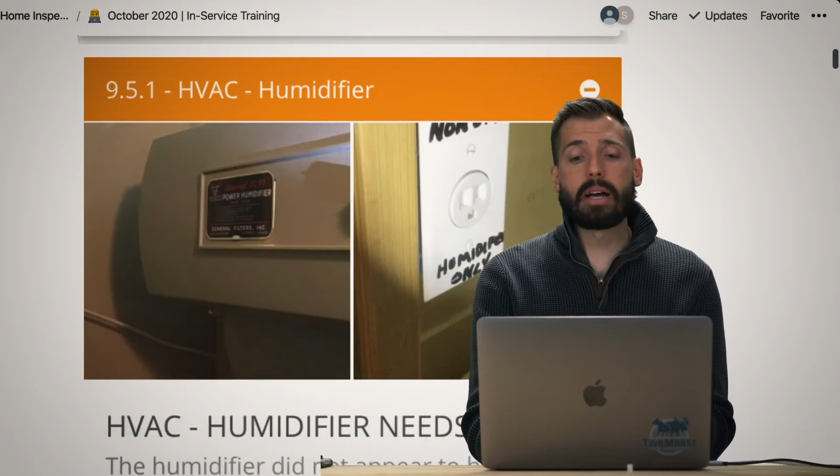So then this one here, a humidifier was just not plugged in, so we want to get that plugged in. Right now in our area, there's a bunch of freezing cold weather coming our way. We actually now have a big snowfall and we have snow staying on the ground, and it's pretty typical for our area.

Where we're at right now is almost 10,000, about 9,500 vertical feet. We get snow pretty regularly and pretty intensely, so our winter season is here, and we want to make sure that whenever our inspectors go out, they check that the irrigation is properly winterized.

That's beyond the scope of the inspection. All we're saying is, pretty please, make sure this has been winterized. Inquire with the seller, make sure it has been. And as a homeowner, you want to make sure you're winterizing it every winter before it starts to freeze.

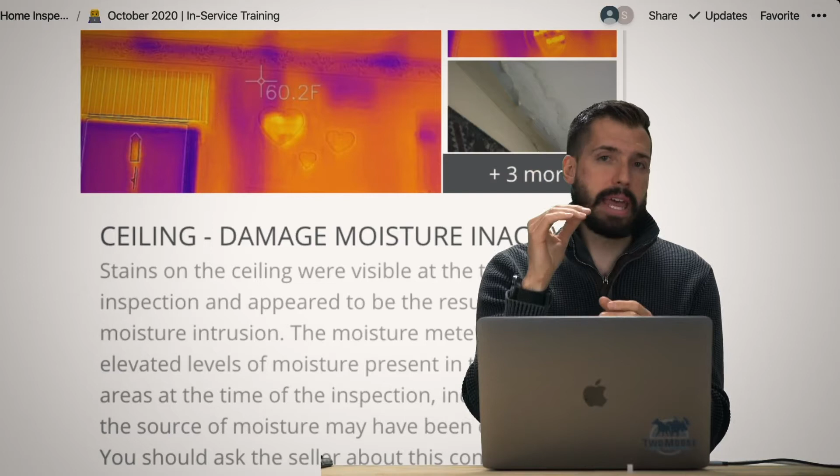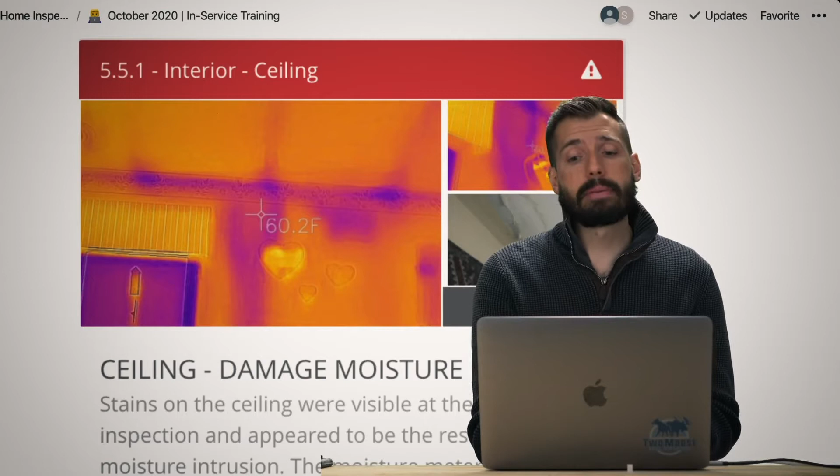So then, ceiling damage with moisture. This one was really strange. There was a plumbing exhaust vent, and there was water damage that totally destroyed the ceiling. But there was no damage between the roof and that first floor, only down on the lower floor. Looking at the thermal camera, it looks like that leak is following down the pipe, and wherever the pipe turns to the right, the water is falling off and causing damage to the ceiling. So we got that all written up.

Exterior grounds: this particular house was in a floodplain area. As an inspector, we want to make sure you're getting the proper insurance and that you're aware that in a case of a 100-year flood - which doesn't mean every 100 years, it means that's the likelihood of it occurring - and recently that occurrence has been greater and greater. So if you're near water, in a floodplain, and it's highly visible to us as an inspector, we want to make sure you're covered.

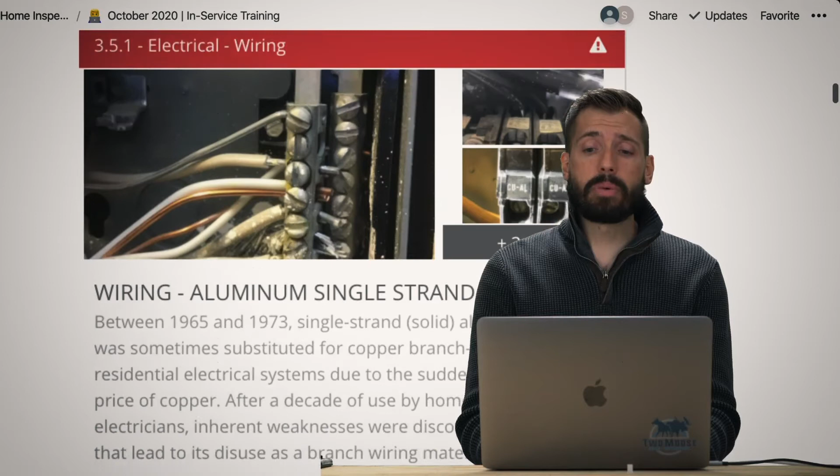Then we have aluminum wiring, single strand. Aluminum wiring is a really good way to catch your house on fire. So we want to make sure it's using the proper type of connections, as you can see here. If we see aluminum wiring, we really want the homeowner to be very much aware, because sometimes houses with aluminum wiring have a difficult time getting insurance and other things along those lines.

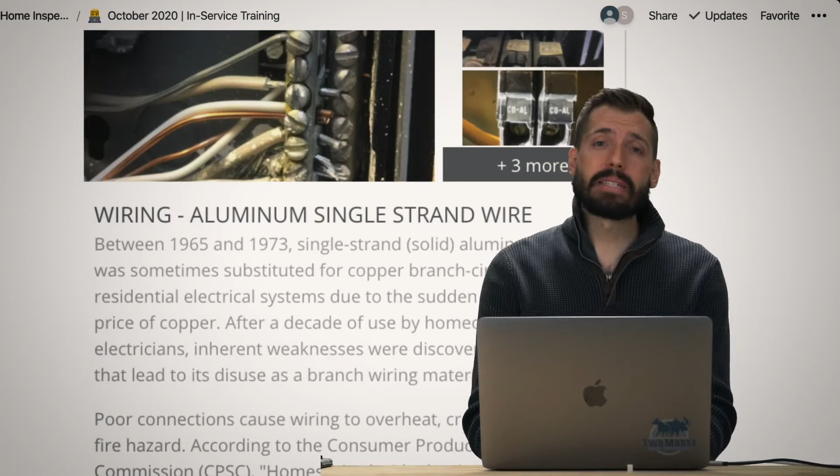Now, the aluminum wiring can be corrected, it just has to be done correctly. A lot of people that do electrical work don't necessarily know what the rules and regulations are behind aluminum wiring. So whoever it is, you want to make sure they are competent and know exactly what it is they're doing or should be doing.

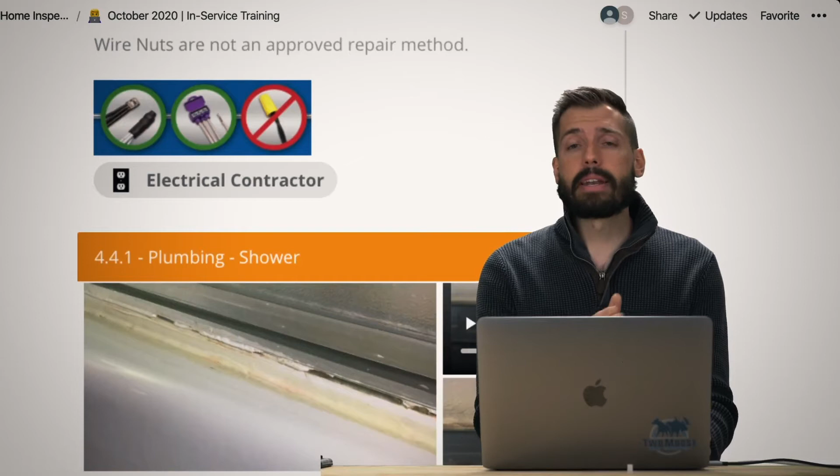So then, moving down - shower door loose. This whole door was actually loose and not at all connected to the bathtub. Little things like that we find, and that was just kind of an amusing thing to have found.

This one here, your service panel - you want the hot tub GFCI breaker to be present. There was none. Imagine a GFCI is basically saying, I'm going to give you electricity, you're going to give me electricity back. As soon as that circuit is broken, the GFCI cuts it off and prevents you from getting electrocuted, which is what we're looking for. So obviously for a hot tub, where there's a lot of water and electricity moving those pumps, we really want to make sure that's taken care of with a proper GFCI within the proper distance from the hot tub.

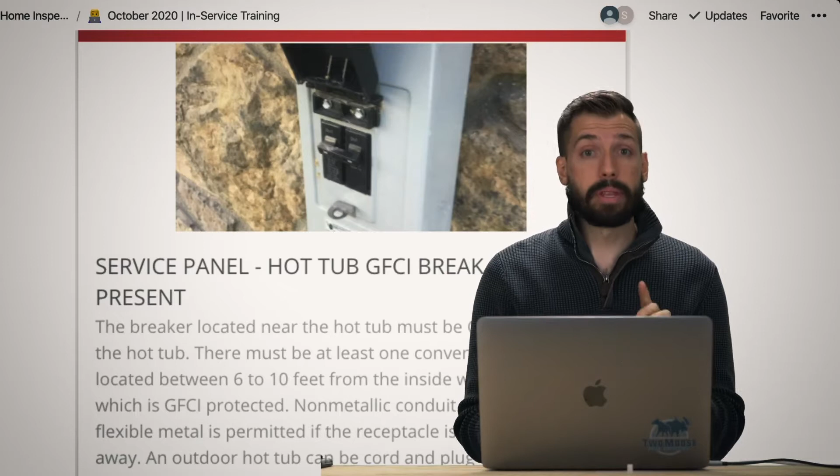So then this house - oh my gosh. Whenever I see steam coming up off the water, I'm always interested to see how hot it is. This water was 149.9 degrees. That is insane, so hot - within a second of contact you can get a third degree burn.

So what did we have to do? In this house, I normally don't intervene, but on this house, I went over to the hot water heater. I turned it from very hot down - it's like A, B, C, very hot - I turned it down to A and then drained the water.

And now we should have a safe level of water. It was an easy turn of the knob to prevent somebody from getting injured. A lot of times we'll interject - we aren't supposed to, but if I can prevent somebody from getting injured, I'm going to do what I can.

Moving on, speaking about injury, this one here is a gas line that is uncapped - an abandoned termination. If anybody turns one of those valves, the entire house fills up with natural gas and explodes like in the movies. So we just want to make sure those have caps on them, so if somebody accidentally opens the valve, the gas has nowhere to go and everybody's going to be okay.

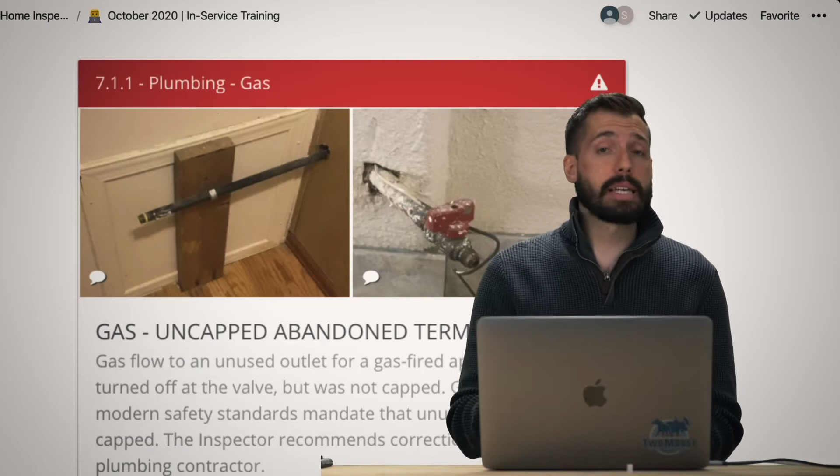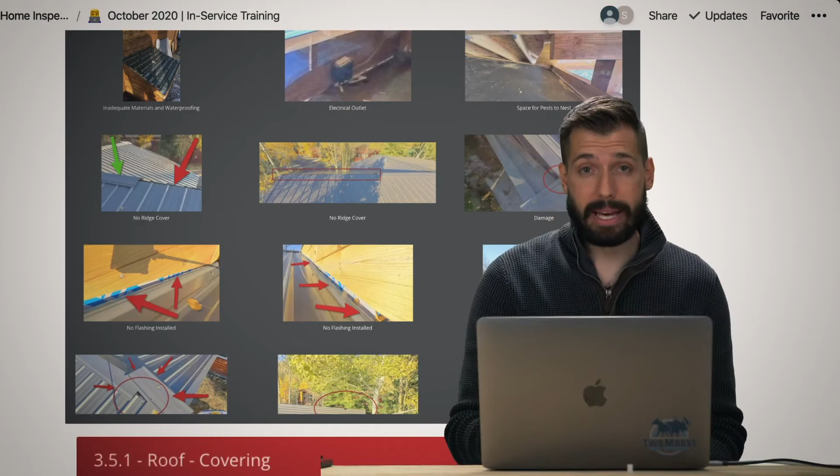This house had the worst roof that I had ever seen. You can kind of see from some of these pictures - the main issue is where the two pieces of metal come together, there's a hole at the very top of the roof. They never put a cover over this hole, so the roof is doing literally nothing. There were so many issues ongoing - it's by far the worst roof installation I've ever witnessed, and it was a pretty recent build.

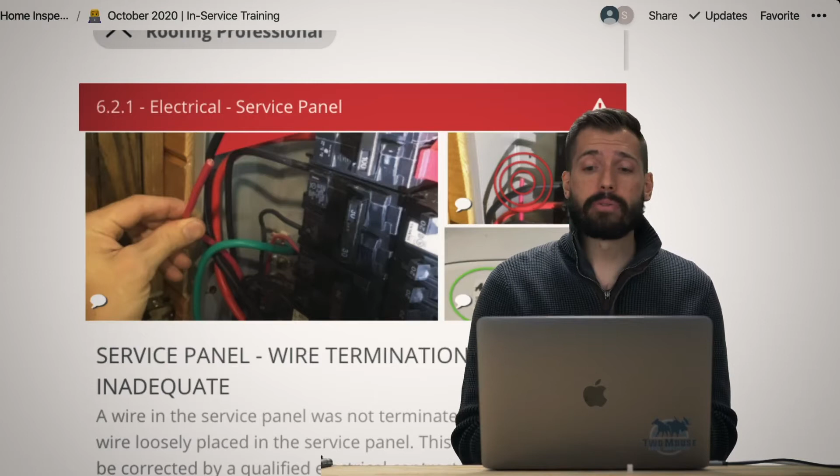The next interesting thing is a wire that was not terminated properly. Going to your dryer, we have 4 wires in modern wiring: a hot, a neutral, and a ground - hot, neutral, ground - and that's if you want to do a 240 volt. What you can see circled in one of these photos is that you can do 120 volt or 240 volt. The way they had this wired up, those wires were connected inside of the dryer, so whenever you turn the dryer on, they become connected.

What happened is that in the service panel, there was one wire at the end that wasn't plugged in. Normally the power comes in this way and goes to the dryer, but they didn't realize that by turning on the dryer, we've now electrified the end of this. Thank goodness - I could have been knocked on my butt so hard, realistically gone to the hospital, if that service panel had made contact with that wire, because at the time I was actually running the dryer. Scary, so be safe around electricity. Just because you don't think electricity is going into it, you have to remember what's at the end of that wire, and electricity can be going back. This is a very common thing we see pretty frequently, so just something to be aware of.

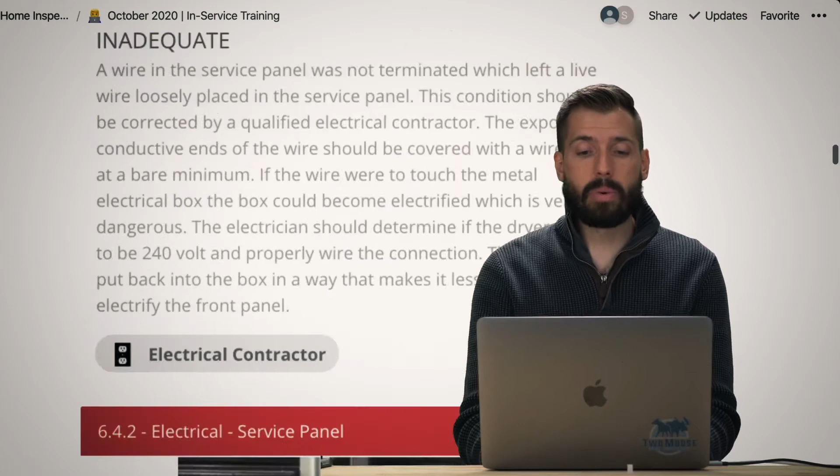Moving on, this one here - how many manufacturers did this have? This panel was made by Siemens, and the breakers were made by Square D, Eaton, Cutler Hammer, Westinghouse, and of course Siemens. We had 5 different manufacturers inside of that service panel. Could it work? Yeah sure, it was working, just it's not ideal. You want to make sure everything is listed - every listed electrical component is designed to work a certain way with certain components. If you're using other manufacturers, they may not have been tested to work together appropriately, and we just want to be very careful with that.

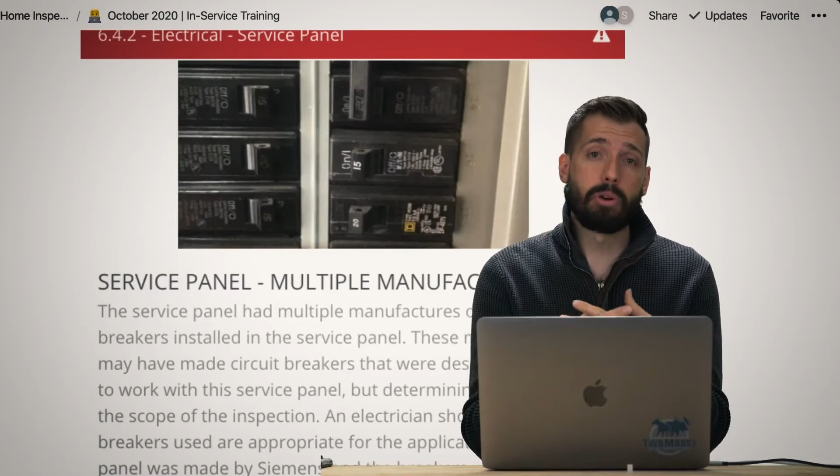Man, this was a gorgeous structure, except that it was failing. And so that's bad.

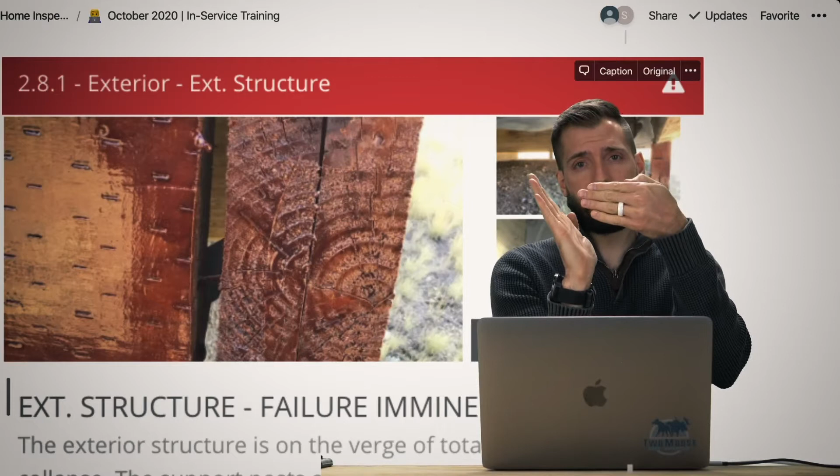Basically what we have is that the main rim joist was peeling off like this, and the whole deck was about to fall over. Not ideal, not safe to walk on, not safe to be on. Here's a few photos of that.

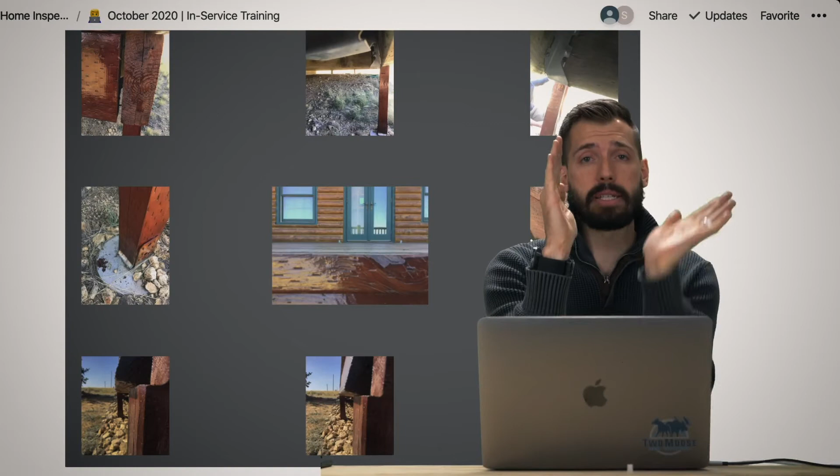Basically, if you have what's called knee bracing, that 45-degree angle where you have the top of the deck, the post, and then the knee bracing right here, then you're good to go and you could prevent what's happening from happening. However, there's some other issues going on, so just get an expert on that.

We also had venting into the interior crawl space. So the fan inside of the bathroom, meant to take all that hot, humid, moist air up and out, was actually going down into the crawl space. Less than ideal. Don't want that to happen.

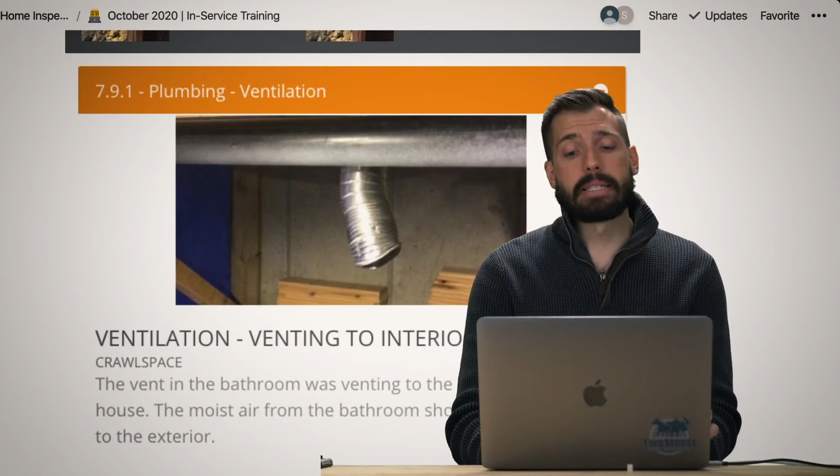So what do you do if whenever you turn it off, it's still leaking? Well, you turn off the other supply lines. So the other supply lines were turned off. However, those valves both failed, and so now I have a leak coming from the valves and whatnot.

Yeah, it's just not great. It was not great, but we got everything cleaned up with a sponge and contacted the listing agent. They got a person out there to get it repaired, not super quickly, but at least it was taken care of. And this had been an ongoing issue, so the damage that was already there was already there.

But there are certain valves that we see underneath sinks that we do not operate, because those valves have a high likelihood of failing. Case in point, they failed. So just something to be aware of.

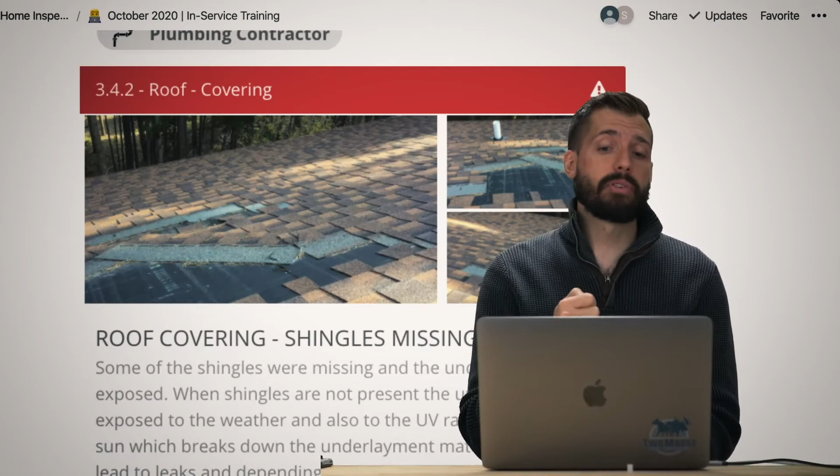In that particular case, I wanted to make sure we were getting things taken care of properly. So what we did is we just went up onto the roof and looked with our own eyes, because you couldn't see everything from the way the structure was set up. And there you go—huge roof problem. Glad we got it taken care of.

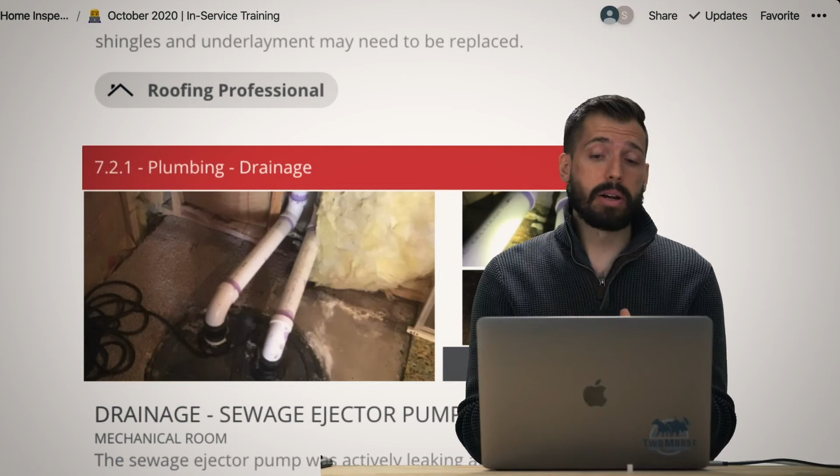This here is called a sewage ejector or a lift station. It basically takes all of the stuff that you flush down a toilet and raises it up so it can go out with the rest of the plumbing. The problem with this one is that it was leaking because it's constantly holding on to water, and the leak was very, very slow—slow enough that it wasn't super noticeable, but there was mold everywhere, filth, and a terrible smell.

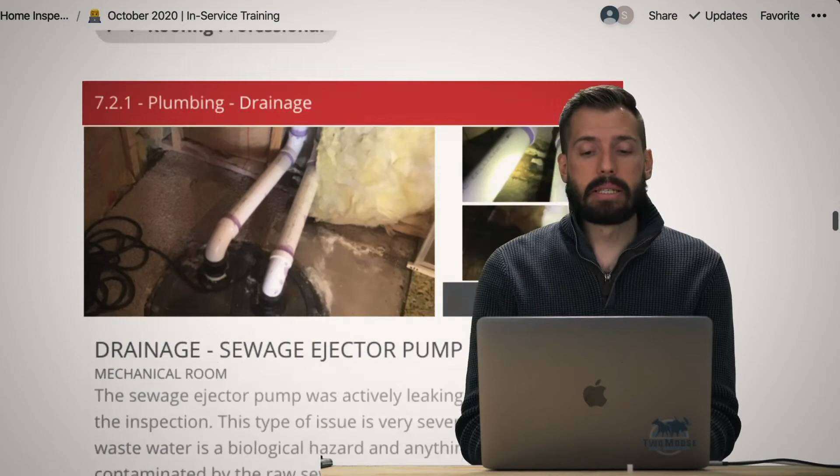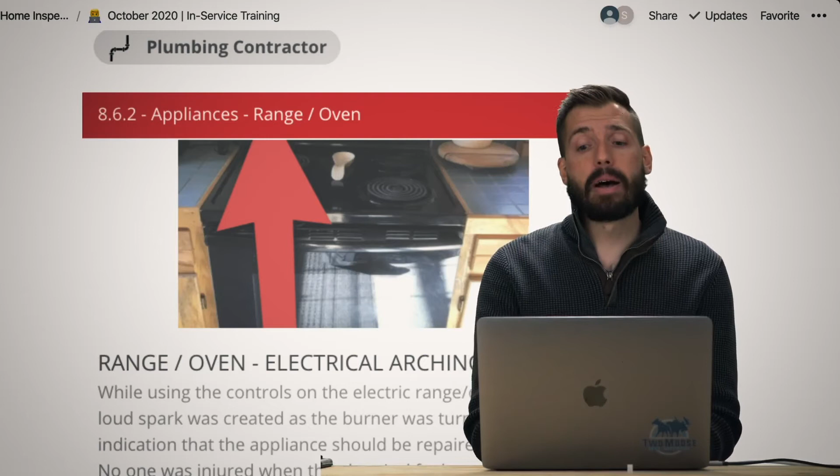Anyway, that's a thing. This range almost killed me, so that's neat. I touched the knob to turn it on and a huge white arc just sparked right out from there. Not safe, not ideal. So anyway, this range and oven should be repaired, is what it comes down to.

And so windows like this, we are very safety conscious. I tell people I look at the world in 3 different ways or viewpoints. One is as a raindrop. If I was a raindrop, where would I want to go? That helps us identify if water protection is adequate or if things are working the way they should as far as preventing water intrusion.

The second thing I think of myself as is a grandparent. If I'm grandpa standing at the top of these stairs, do I feel safe going down? Are the handrails good? Is the spacing of the stairs appropriate? So I think of myself as grandpa.

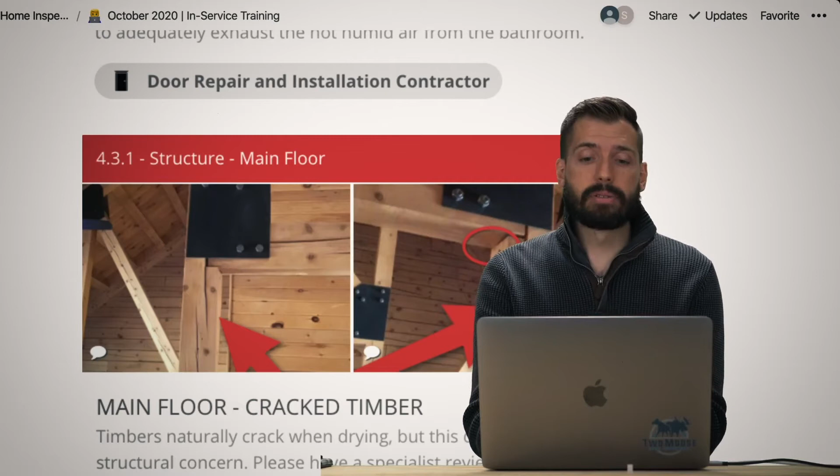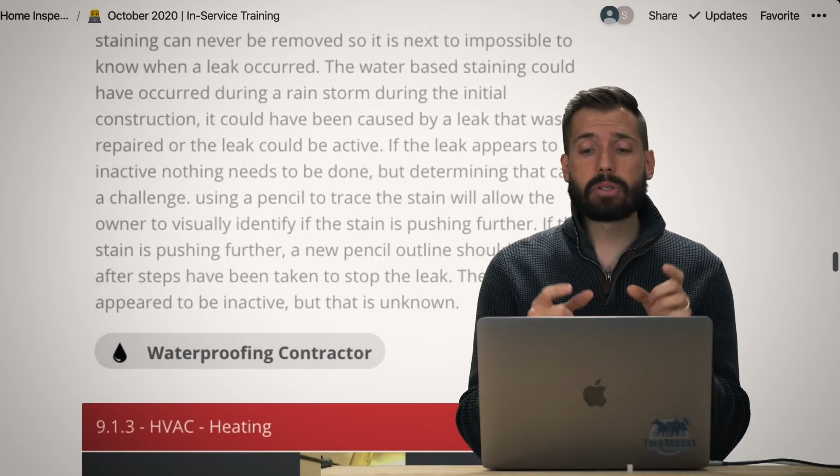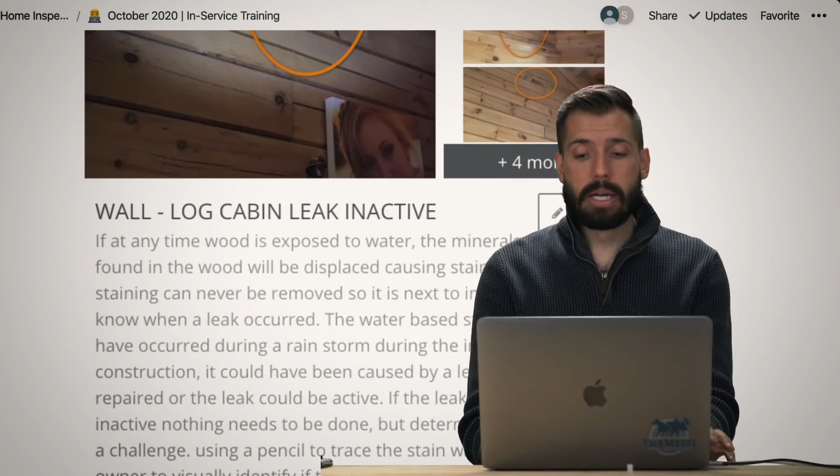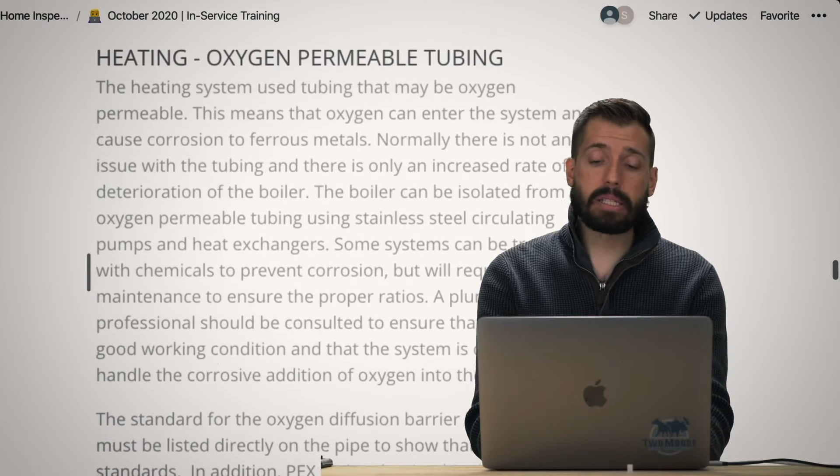So let's take a look here. We got oxygen permeable tubing—ugh, this is the bane of my existence right here. Basically if it doesn't say DIN 4726, and gray is normally the color, what this means is that it's an oxygen permeable pipe.

Whenever you have baseboard heating, baseboard water heating, radiant floor heating, or whatever, the boiler is normally a ferrous metal, which means it can rust. So we'd want that to either be stainless steel if we have oxygen permeable piping, or we want a stainless steel heat exchanger so these two systems don't interact. Basically what's happening is oxygen is coming into the system and oxidizing, causing corrosion, which can cause a bunch of issues and is very expensive to repair.

With this oxygen permeable tubing, please make sure that if you have any type of tubing, it should be PEX. If it's PEX, that doesn't necessarily mean it's oxygen impermeable, but if it says DIN 4726, then you're golden and don't have anything to worry about.

So then we talked about cancellation policies. For this particular property, on 2 separate occasions we had to cancel the inspection, and we had already been out to the house both times. We were trying to be nice, but I had an inspector put in almost 4 hours of driving just to do nothing and not get paid. So we've changed our policy: if we've already dropped off equipment, you're going to pay a bare minimum amount of money, which we have listed in our agreement.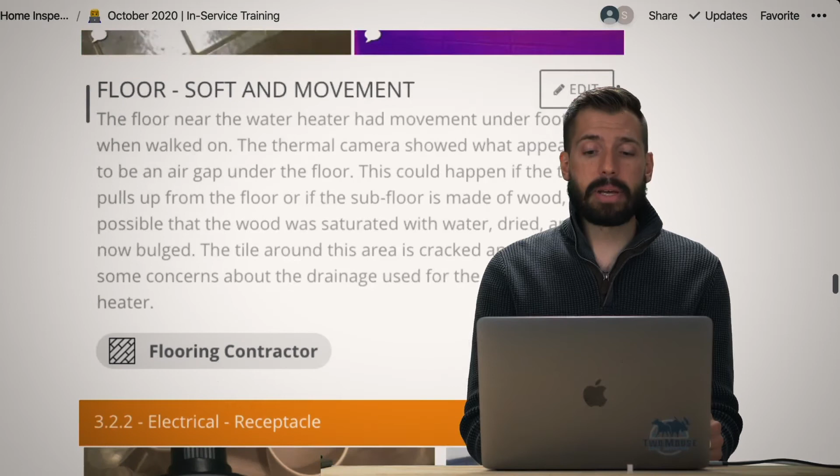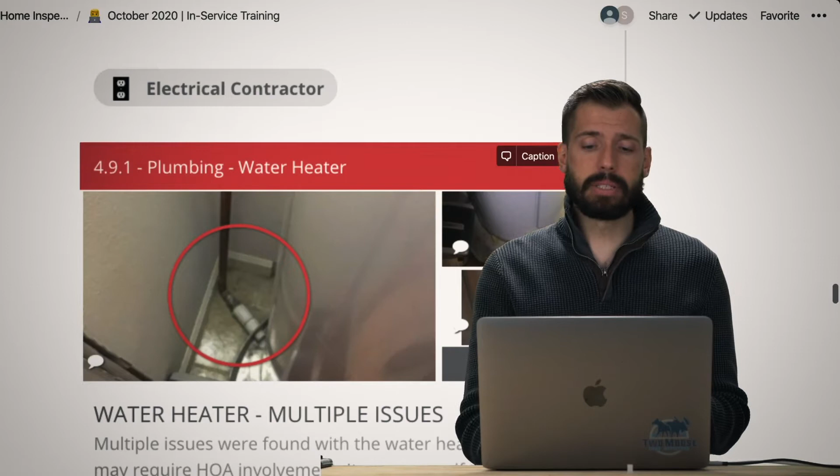This basically comes down to this one here. From a condo, they had it like the water going out into a drip pan, which is not a great idea. Then they had it plumbed - here we go, like plumbed but not even plumbed. It looked like somebody put a screwdriver through the drip pan and then broke it all apart. And then hopefully water goes into this totally corroded cast iron pipe. It was just not ideal.

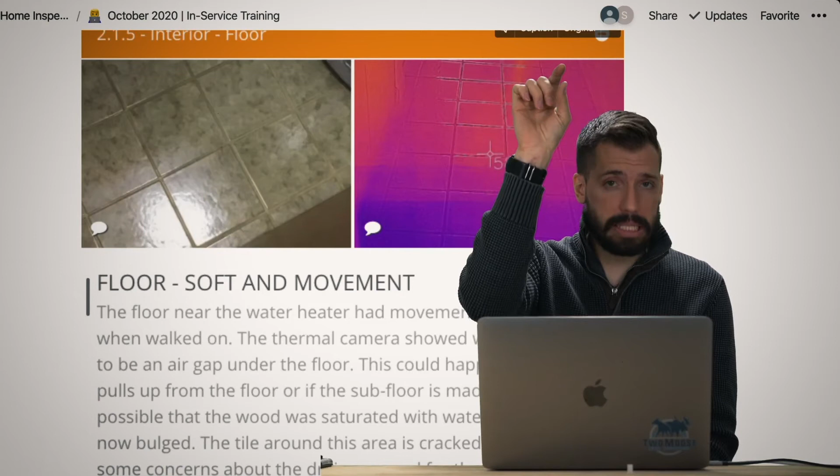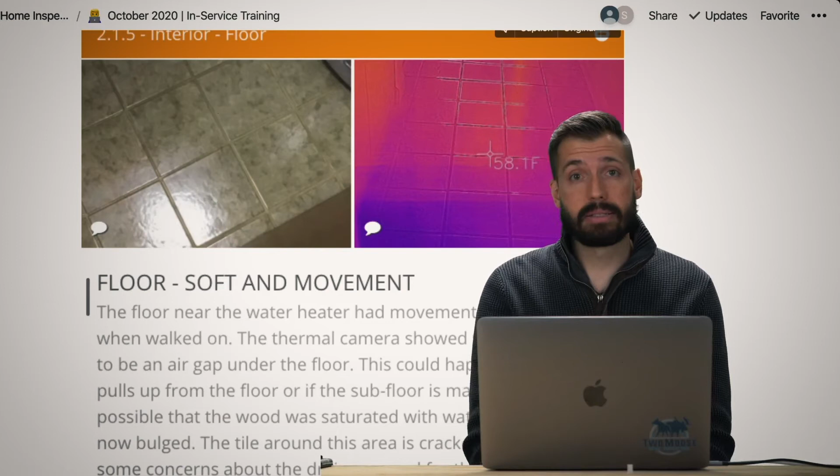So what happened was the floor was damaged. With the thermal imaging, we could see there was an expansion of the floor, which left an airspace in between there. It could be wet, could not be wet, we aren't 100% sure. But basically just really, really bad design, because if the condo above you, their temperature pressure relief valve releases and all that water comes down and floods your apartment, there's no way to trace back to them that it was their fault. And therefore you could have a huge bill. That's not ideal. That's really not ideal.

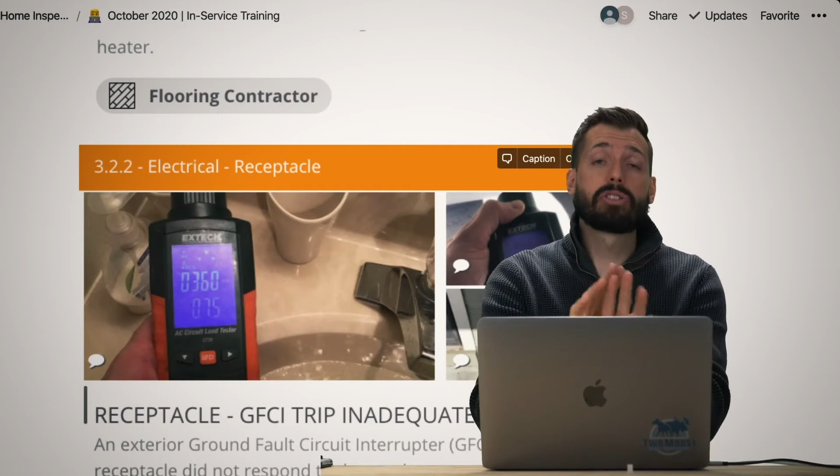So anyway, next thing, receptacle trip inadequate. This tripped in 360 milliseconds. Remember I said if I give you electricity, you give me electricity back, and we keep that going. If you don't give me electricity back, I have less than 200 milliseconds to stop you, so that way you don't get hurt. So this was 360 milliseconds on this GFCI, just get it fixed.

So we just talked about this - multiple issues on the water heater. So much lint inside of this dryer vent. We want to make sure we get the lint out of there.

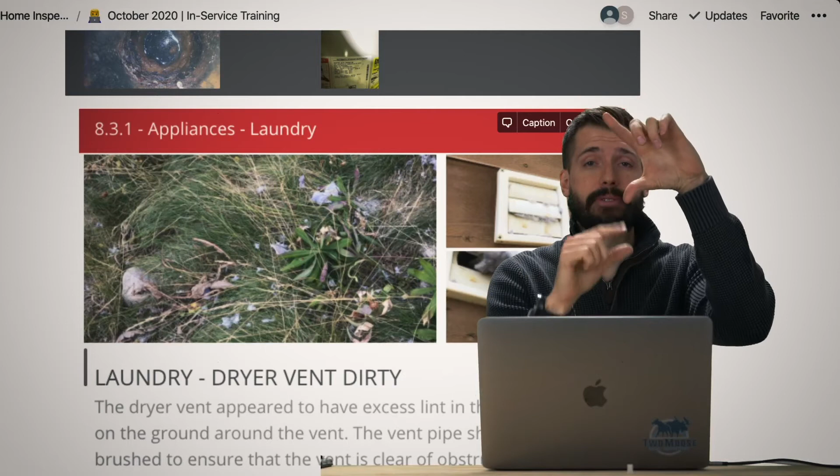The run is 25 feet, so people have all these kinks and other kind of stuff. For every 90-degree turn - if you come in 90 degrees, you lose 5 feet. So if you come out of the back 90 degrees, then come up to the top, another 90 degrees, that's 10 feet you just lost. You then make another turn, or another turn, you could be at 0 feet total distance. But basically, you just have to be very mindful of where your laundry vent is going.

Clean out your ductwork - sorry, clean out your lint trap, make sure we're good to go. I was pulling out just handfuls of this dryer lint. And if that caught on fire, your house is done for.

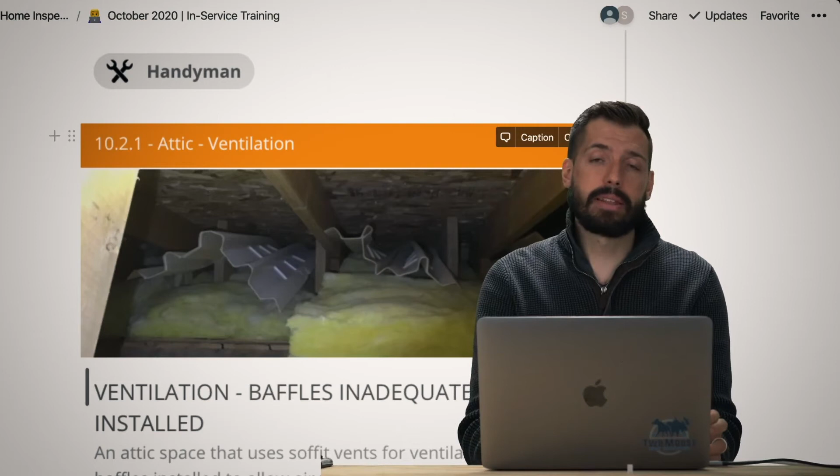Sometimes they don't adequately install baffles - that's just a thing that happens. We want to make sure we have good airflow coming up and into the attic to make sure we don't get ice dams and other things like that. I think an inspector came by that works for the county, a code enforcer, and said, hey, you don't have any baffles in there. They're like, okay, I'm going to put some baffles in. They just throw it in there and aren't doing anything they're supposed to be doing right now. Those baffles are not working as intended.

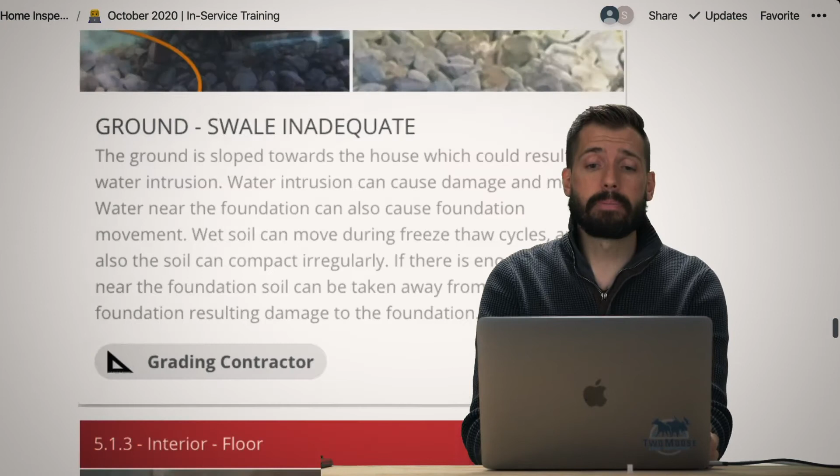So here we had a house where the floor basically had sunk. This floor had sunk because on the outside, we had an area where all the ground just kind of went down against the foundation. I think during the snow melt and runoff, that basically caused some movement of dirt and soils underneath the house. And that is expensive to repair - if it is repairable. Everything's repairable, but if it's repairable...

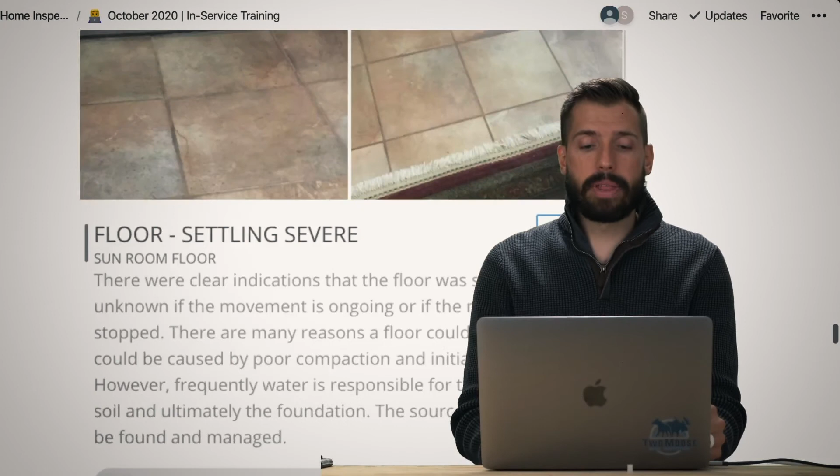Put yourself in the mindset of a little kid playing with an outlet near water. Something goes in, he grabs it, gets shocked. The main thing is if you get shocked, you can tell somebody. If you get electrocuted, you can't tell anybody because you're dead. So does it matter that the code says, oh, only in kitchen areas?

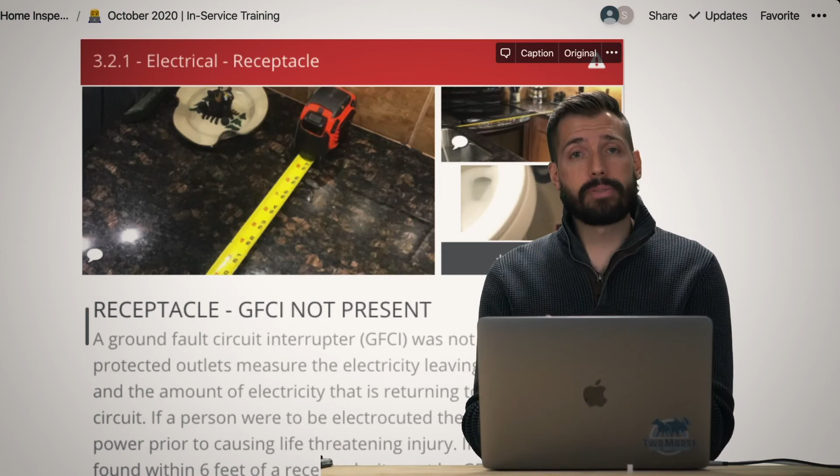No, I'm not a code enforcer. I don't care. If it's predictable, it's preventable. So I'm going to tell you, spend the $15. If you're buying a house, you should have $15. Spend $15, put in a GFCI. Whew, all right, I'm going to get off my podium. My apologies, I get a little worked up about electricity sometimes.

All right, plumbing drainage. This was the worst house I've ever seen. Ever. It was crazy, absolutely crazy. We had angles, we had, oh my gosh, nothing was supported. The angles were insane. I'm sorry, I get excited sometimes because I really enjoy home inspecting. Wow, terrible, but wow. But okay, so what do we do?

For me, if this was my house, there was so much space in that crawl space, so easy to work around. Okay, I have a toilet here, I have a sink here, I have a bathtub here.

So what do? If you ever played with an erector set, you just put it together, and then once it's all put together, you glue it and put it together, and you're good to go. Anybody can get this done. A plumber can get it done a lot faster, but I, as just a novice, could probably replumb this entire area maybe in a day and a half maximum. It's not that big of a deal, and the expenses aren't that huge.

So people will lose their mind and be like, oh my God, John, I don't know what to do, this is insane, blah blah blah blah blah. Yeah, great, cool. A person built it wrong and a person can fix it correctly. So anything we find in a house, I just want you to be aware of it so you know what's going on, and that's good enough for me.

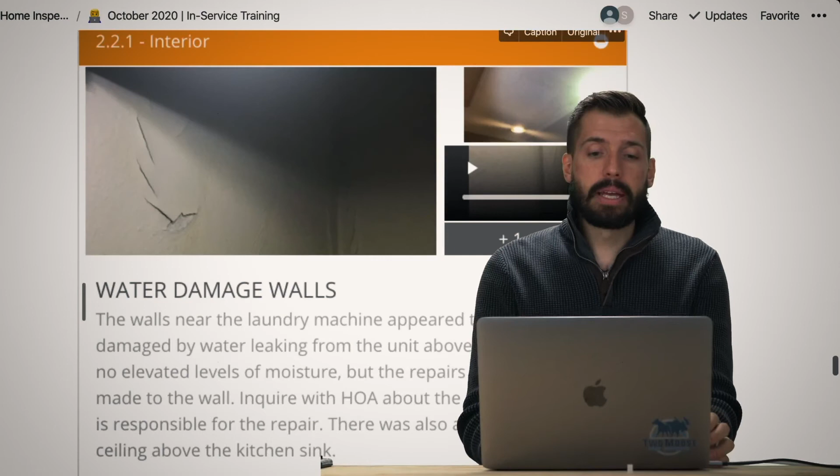So next we have water damage coming from a condo up above. We just want to make sure, does the HOA cover that? Do you cover that? Does the person up above cover that? We just want to make sure.

So the main reason, again, predictable, preventable. We want to keep people safe. And if we're putting somebody inside of a garage space, do we have proper fire barrier separation? Do we have separation from gases and other things like that? There's so much that goes into it. I'm talking too much, let's keep moving.

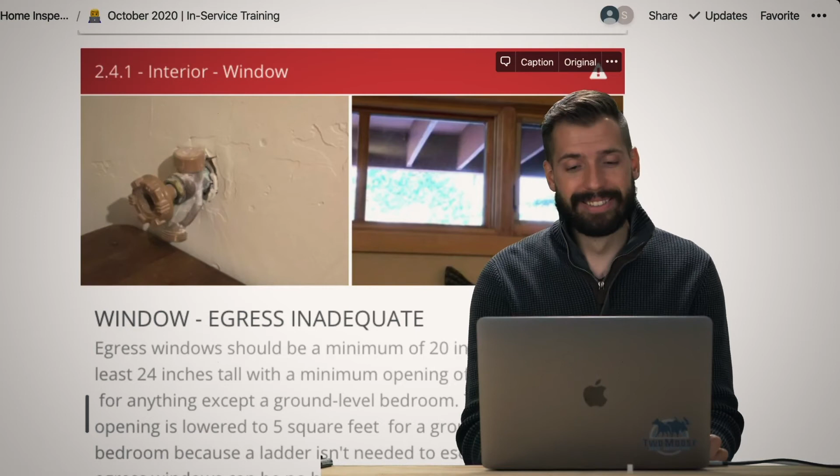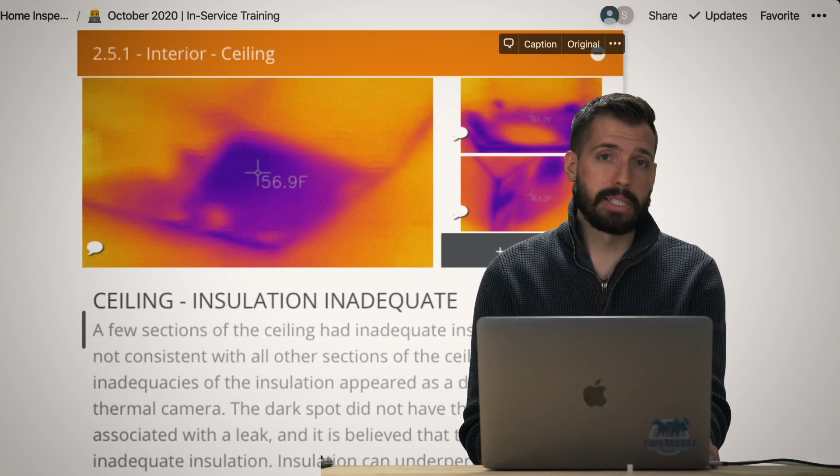All right, so insulation, sometimes insulation can be packed down, sometimes it can be not there at all. And everybody freaks out about, oh well, it's going to cost me so much money. No, it's not going to cost you so much money, don't worry about it. If you're getting your groceries and you leave the door open one time while you go out to your car and come back, you may have lost more energy than this insulation will lose you in the course of a season. So just put everything in perspective, keep it in mind.

All right. Square D, they had a recall on these AFCI breakers. And if they have blue on them, then they could be recalled. But in order to check that, you have to take the breaker all the way out, take a look at the back of it, and then put it back in.

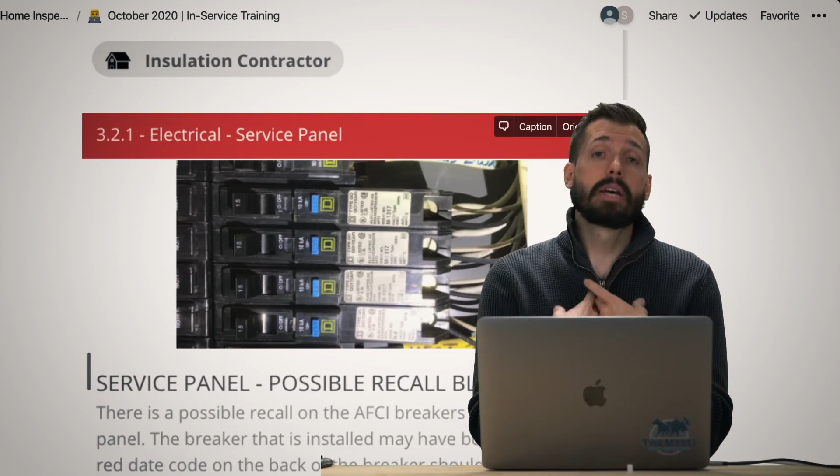That goes a little bit beyond the scope of a home inspection. My recommendation is just have an electrician come and do that work for you, because you don't want to get electrocuted. Electrocution is bad, but we also want to make sure we have the proper stuff in there. So if you see the blue on a Square D, let's get it taken care of.

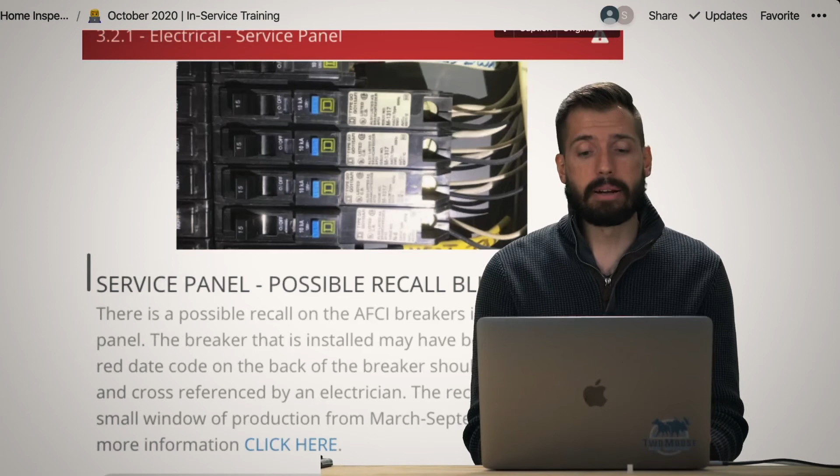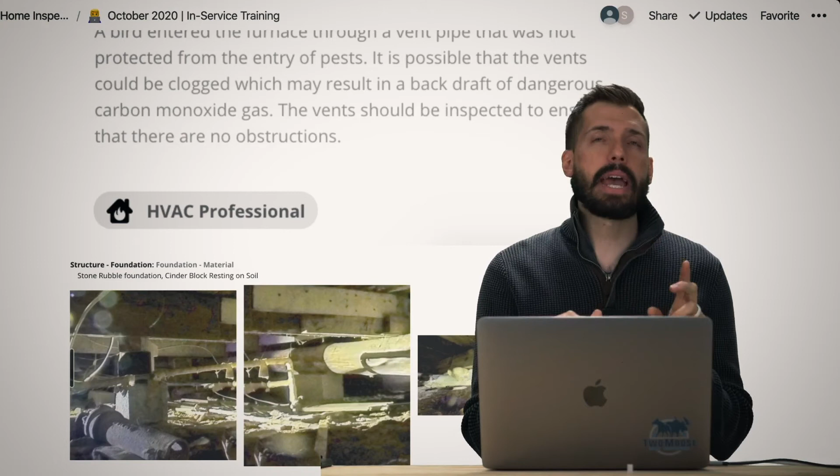So, interior floor, uneven surface. Yeah, it was. Holy cow, super uneven. If we come a little bit further down here, basically everything, it was these pictures here. I don't know if you can see the cursor or not, but basically they had logs, they had rubble, they had all these things holding the house up and together, which makes perfect sense as to why the surface failed.

So that's not great. The bathtub, they put the pipes together. Remember I told you, redo the plumbing, put the pipes together, and then take them apart, glue them, or in this case, just screw them tight. They didn't do any of that. Water came out all over the place. Such is life. It's good to know about it ahead of time.

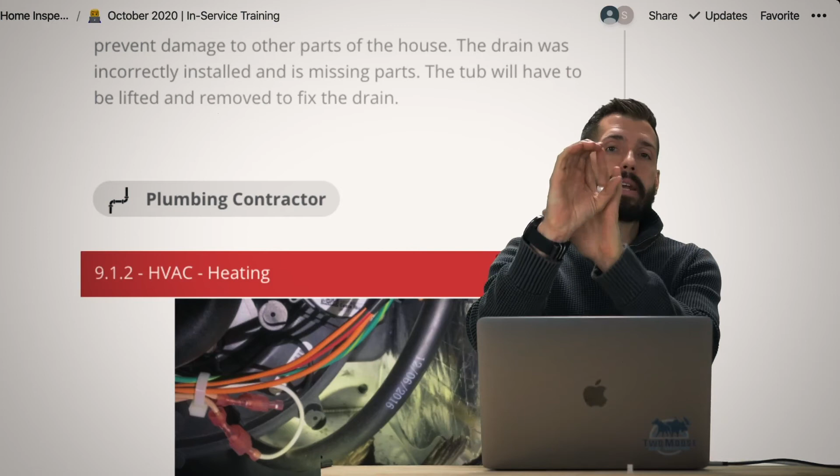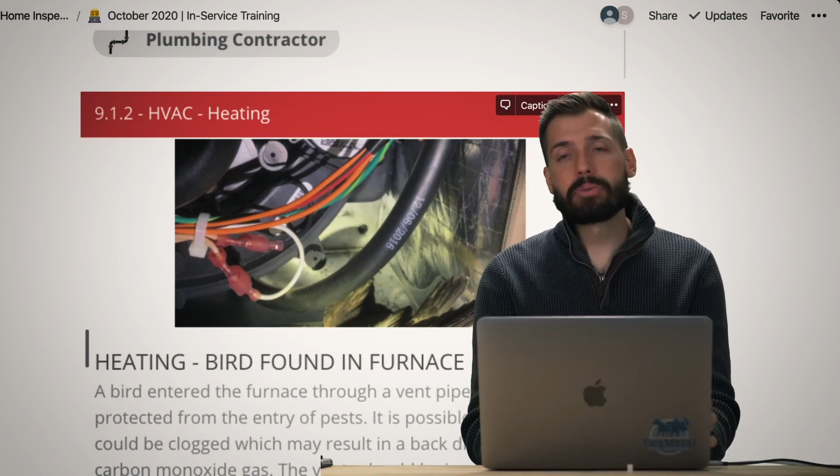Sad story, very sad story. There was a bird, and I always tell people, put a metal mesh screen on your penetrations that come out of your house, so that wildlife doesn't get into it, like birds and squirrels and other things. I just say these things because it could happen. I open up this furnace, and this bird falls down almost onto me, scared the crap out of me. My heart rate was through the roof, immediately sweating because I was wearing a big puffy jacket since it was a cold day. But, protect wildlife, please. We have an obligation. If you know that your home can do harm, do whatever you can to make sure your home doesn't do harm. That's all there is to it.

So moving on, if you have a drainage pipe in the plains at 8,000 vertical feet, you don't want it to be exposed to air, because then all of the stuff you flush down the toilet will freeze, and then you'll keep flushing and it'll just come back to you, which is not ideal.

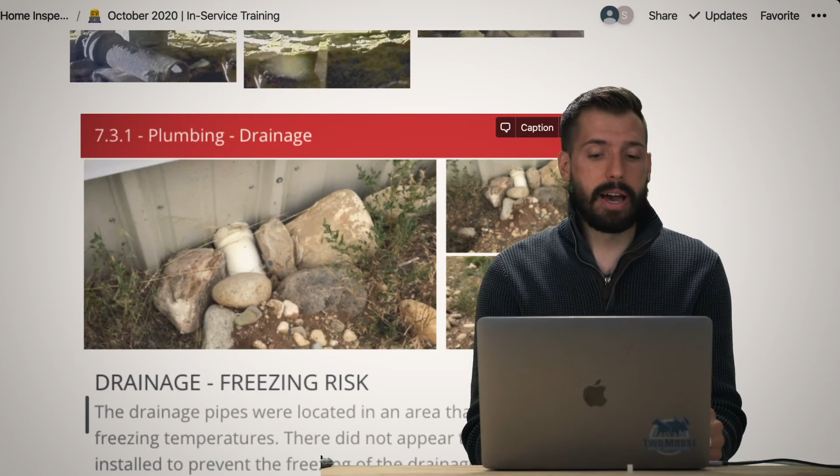So then if something's supposed to be buried under the ground, we want to make sure that it's buried under the ground. This is a polyethylene coated copper pipe. It should be buried. That would be ideal.

So then we had a supply well test failure. We just want to make sure that your house is able to produce enough water. Really interesting, this was an award-winning home, and I think it was because the HOA limited the amount of water allowed to be used, because water rights in Colorado are extreme.

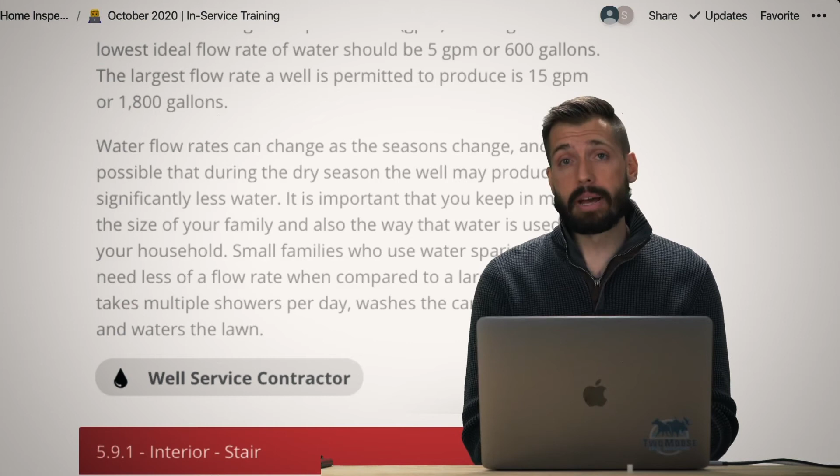So, interior stair. This was a beautiful staircase. However, put yourself in the mindset of a child, or as a grandparent. Could a child fall off of these stairs? The answer is yes. So do I need to put something there? The answer is yeah, you probably should. But do you? I don't know, it's so beautiful. Do you need to? If you're watching this, probably you and I have grown up in some very dangerous houses, or friends that had dangerous houses, just because those were the times. And man, this staircase was beautiful, but also not safe.

So, electrical wiring. This was interesting. Basically they used this Frostex - they took off the outer sheathing of it, which is basically the grounding wire to make sure nobody gets electrocuted. They then put it down their supply line all the way back to the pump, because the water wasn't buried deep enough below the frost line and it could freeze. I don't know if this particular product, with its rubber or plastic sheathing, had BPA or other toxins that could be released into your drinking water. It's definitely not designed for what it was being used for.

Really intelligent way to fix the issue. But the main issue is that there's more going on than just how do we stop the freezing, and I think they just missed the mark on that. But I was really surprised by the ingenuity - it was very, very surprising to me. And it worked, but just follow the whole system - the house is a system. Oh, put more insulation in.

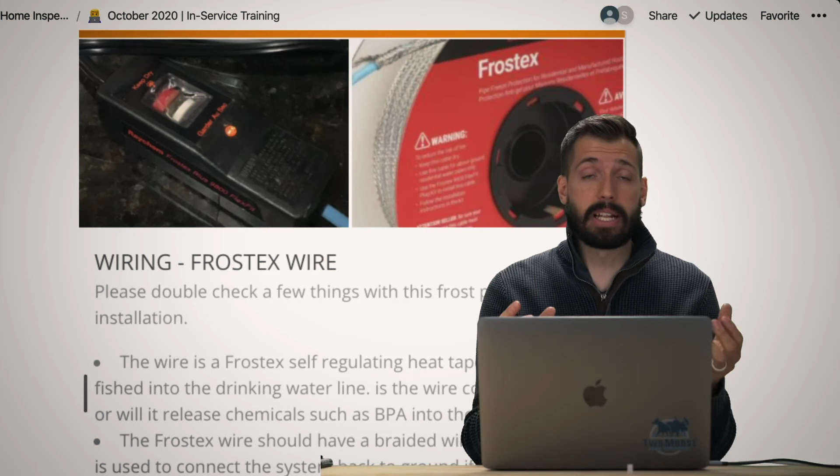No, don't put more insulation in, because then you don't have as much ventilation and then you have more mold. So just things like that.

So what we're going to do with this fire triangle is that we need that fresh air coming in. So what they did was they covered the combustible vents. By covering those vents, bad things have happened. That means now we have to draw air from elsewhere, and because we're drawing air from elsewhere, there's a good chance we could create a backdraft situation.

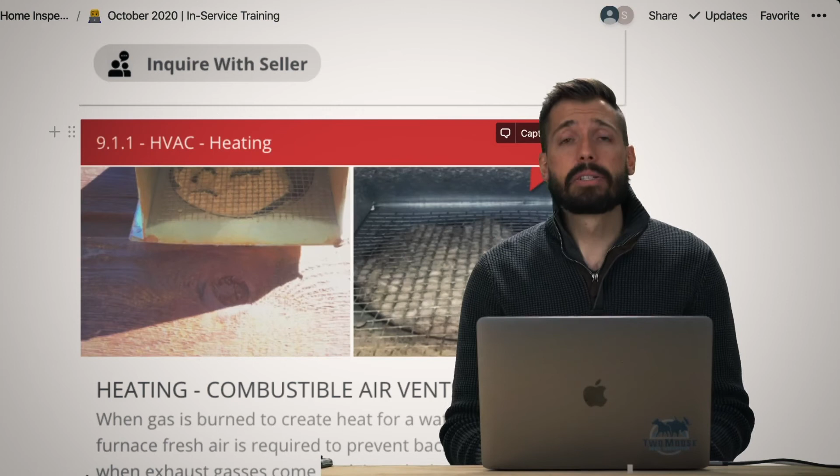This could allow carbon monoxide to get into the house, which is silent and deadly and doesn't have a smell, doesn't have a taste, nothing. Please have carbon monoxide detectors in your house. Please update the batteries. Please have more than you're supposed to have. If it's predictable, it's preventable. Keep your family safe. That's all I have to say.

And the reason that they block this is because cold air comes into that space and it creates a draft. It makes it kind of cold and uncomfortable. It's there for a reason.

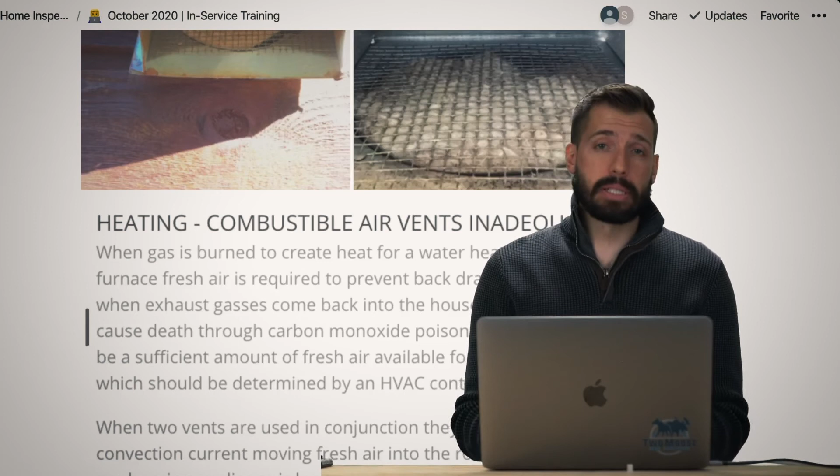Please, just be understanding. So yeah, this one here, there was no fire barrier. Half of the garage was covered, the other half was not. We just want to make sure that any of those gases or fire is all contained and taken care of.

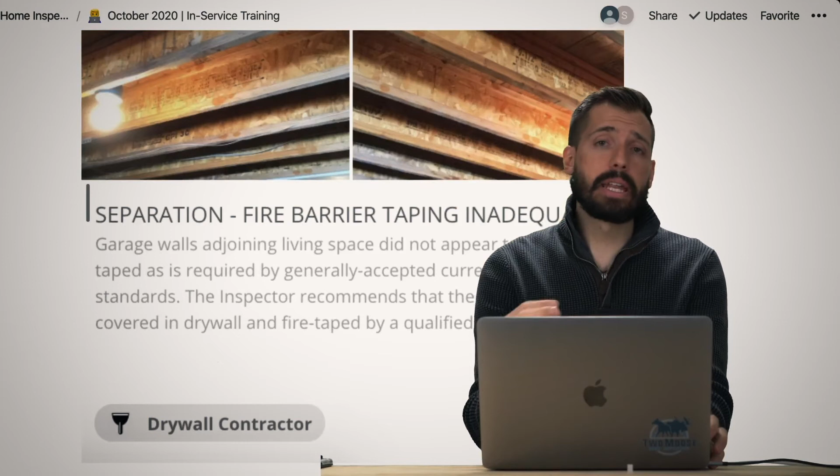Next, water doesn't go uphill.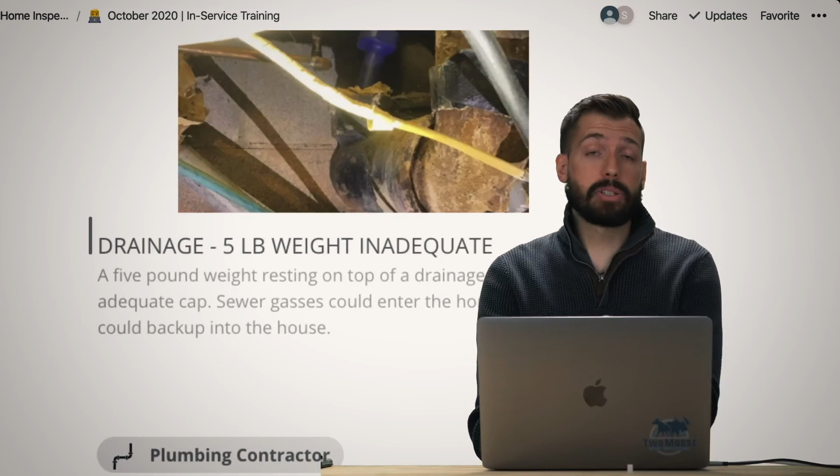So that's bad. Next, if you put a rag with a 5-pound weight on top of it, the 5-pound weight, as it turns out, is inadequate. That is not a good cap to prevent sewer gases from coming back into the house.

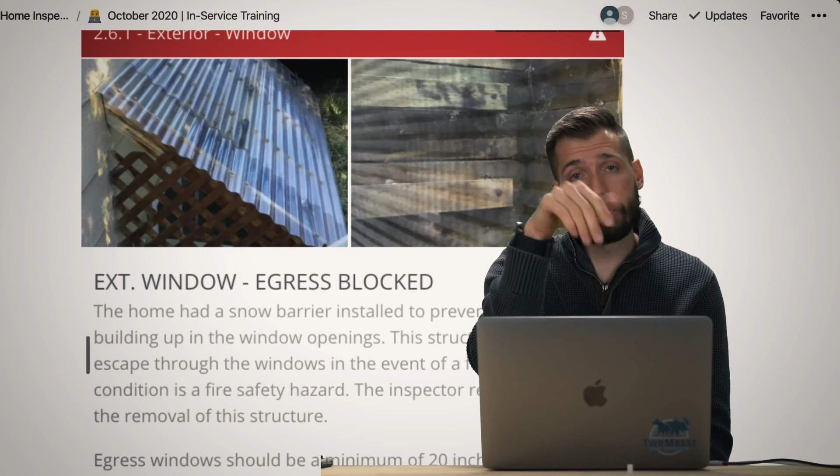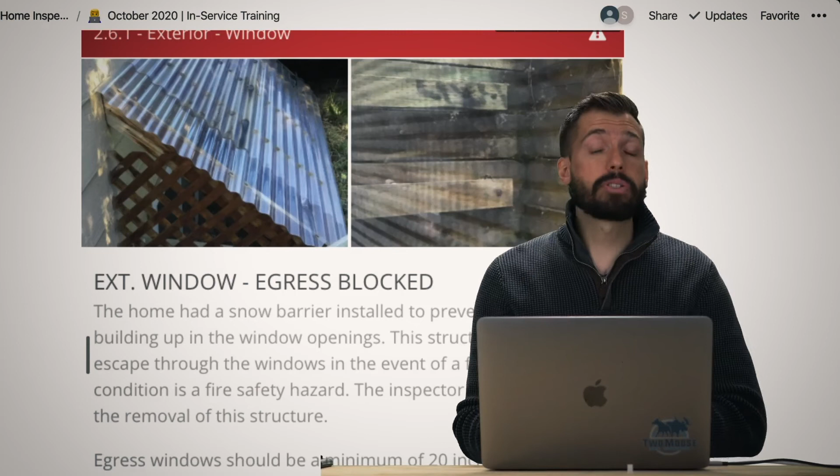Love what they did here. So they wanted to make sure that snow doesn't come into the window well. Awesome. But they built it so robustly that even me, as the world's strongest man, could probably not push that off, especially if there was a snow load on it. We want to make sure that if we have a window well, we need to be able to get out in case of a fire. Put yourself in the mindset: a 6-year-old kid should be able to open the window, remove that window well cover, and get to safety. So that's what we're looking for.

Next thing, range and oven past design life. This thing was old and I did not test it, because if I turn on the oven and the insulation around it isn't adequate, and I overly heat the surrounding space and catch the house on fire, I will feel embarrassed. So my recommendation is don't use it, get them to replace it. I mean, they've had it long enough. They should have replaced it years ago.

A lot of times we have people that have wells, and the wellhead comes out, and then the snowplow comes and hits the wellhead, and people don't have water and wonder why. It's because the snowplow just totally destroyed it, and that is expensive, extremely expensive. So all you have to do is put up an actual physical barrier that you feel confident would stop a snowplow. As long as it can do that, it's a good barrier.

If it can't do that, it's not a good barrier. So, plumbing sink, lots of moisture deterioration underneath the sink. It could have been an old issue, could be a new issue.

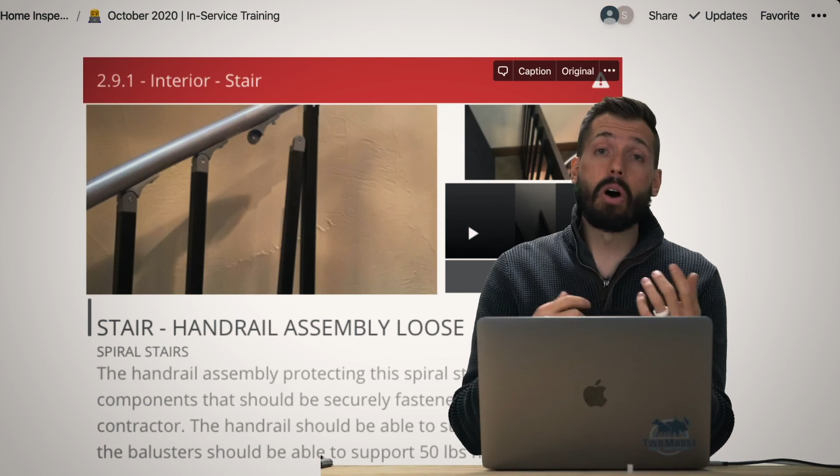All right, moving on, stairs. Every stair I go down, I always end up cutting my finger or something because these stairs that are screwed together always fall apart. Just be very mindful because you just need to be safe.

Here's the deal, water and electricity, not friends. They can intermingle dangerously, but they are not friends. So pretty please don't put main water supply lines that can have condensation near the main wiring coming into the house, or outlets that are not GFCI protected. Just be smart when you're building a house. That's all there is to it.

These stairs, this is not a skewed or stretched photo. These stairs were basically a ladder leaning back, is what these stairs were. Put yourself in the mindset - grandpa, not safe, don't do it.

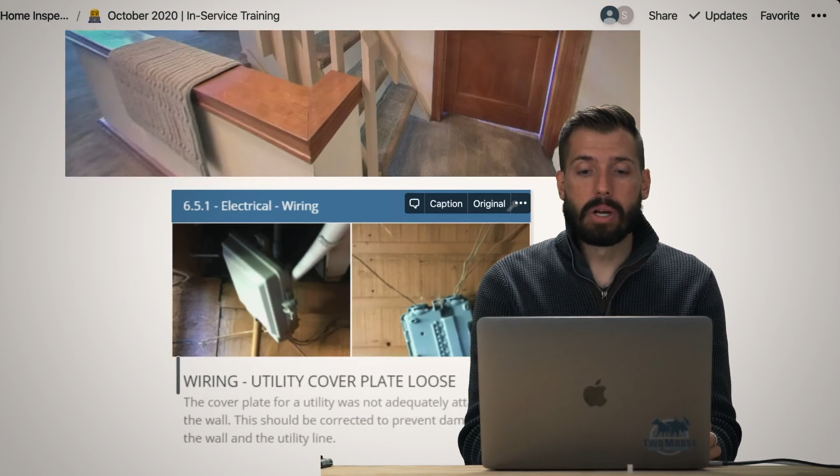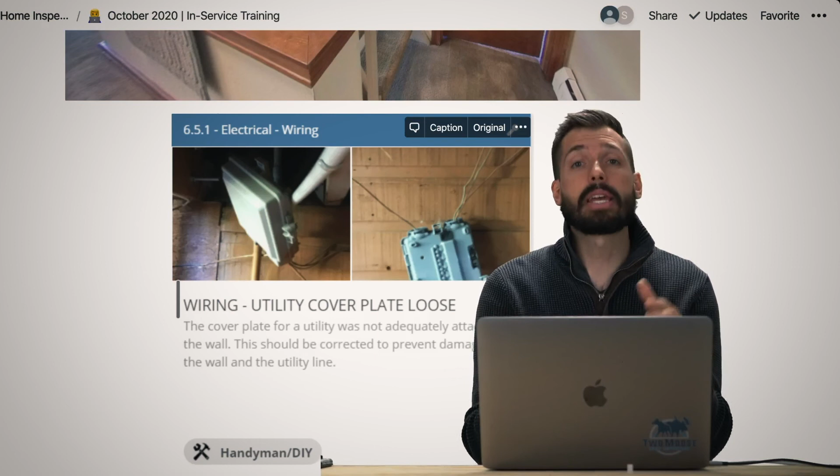All right, coming down, utility boxes. Normally the utility boxes need to be corrected by the utility company because it is unlawful to open those boxes. I'm not going to say unlawful, but you are not supposed to, because people have stolen cable in the past, stolen telephone in the past, done all these things. So they just say you are not allowed to interact with those utility boxes. Just call the utility company.

You're good to go. So, inadequate drainage. Basically you need to have a drip pan, and that's one thing. Then you need to make sure that water has somewhere to go. A lot of times they'll have a drip pan that goes nowhere, and that's not good either.

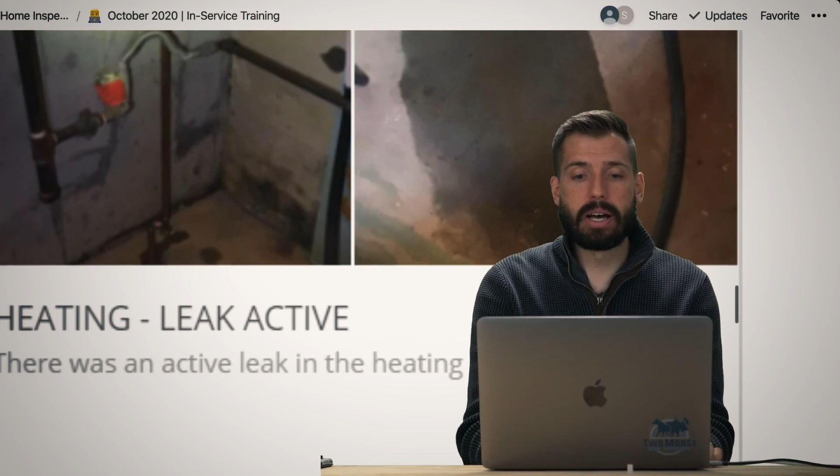So then heating, leak active. There was an active leak in the heating system, and that is just not ideal. It's pretty much as straightforward as it goes right there.

So next thing, this block here, you could just rotate it with your hand. There's a video, and we always have videos for certain things in our reports. You can just rotate it by hand. It's not supporting anything. If it got moved out of the way, if Jimmy was running by and kicked it by accident, the structure fails or can fail.

So just not great. Don't put hot tubs on things that aren't supposed to have hot tubs. Hot tubs are crazy heavy, we're talking tons of weight. And if the deck is not designed for it, the deck will fail. This deck failed. Luckily it was on the ground, so it failed further onto the ground, which isn't that big of a deal, but it's not ideal.

So there should be a clean out whenever you have a drainage pipe. We hate pulling off toilets, but we pull off toilets to run the sewers, to run the snake. Basically there needs to be a clean out because sometimes you need a different piece of equipment that isn't necessarily as flexible as our snake is with the camera on it, our sewer scope.

So if you see that, just ask a plumber what it would cost to cut, glue, and place together. It'll help you out in the long run, because if you have a backup, you need to get to it. So we try to test everything.

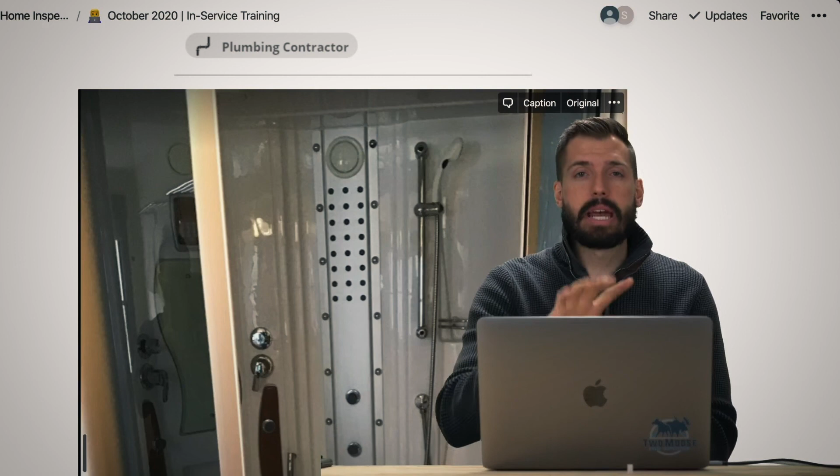We did not test this shower. Why? Well, if you look at it, the controls are all the way in the back, and there are more spray nozzles than any other shower we've been to. You basically shut yourself into it and then turn it on, which I think would be uncomfortable because the first little bit of water would be cold. So many nozzles, we didn't test it, and we said we didn't test it as well.

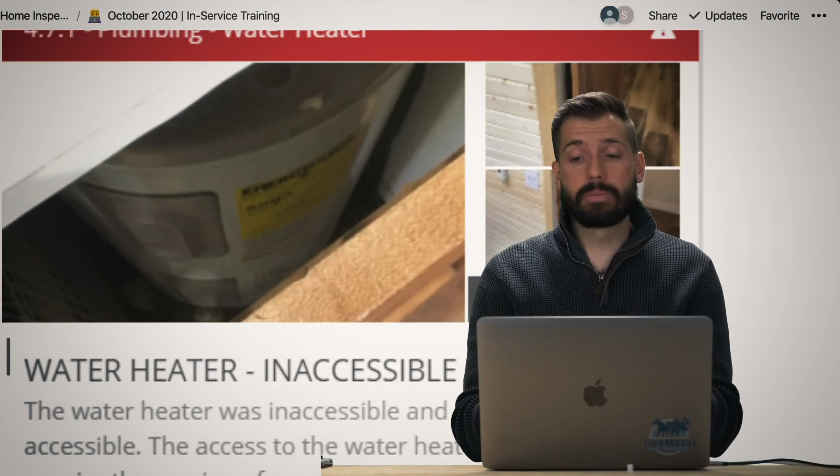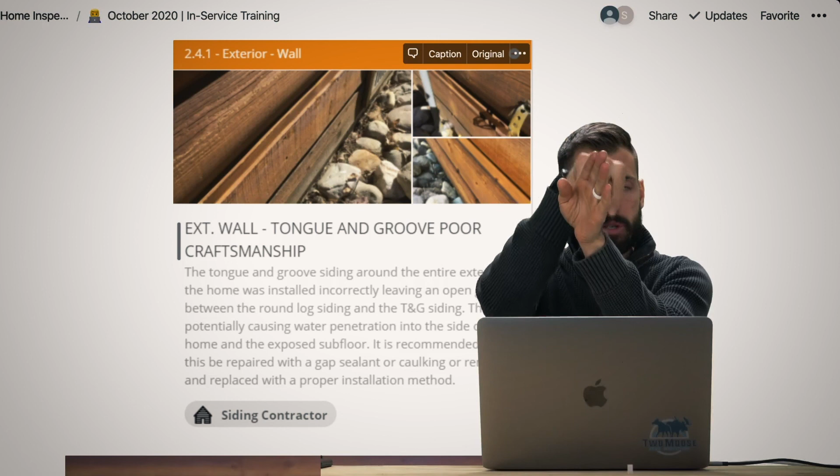So then you move yourself through, basically think of yourself as a water droplet. If I come down and this is the water hitting, then we want the next piece to be here, so it goes down, and the next piece to be here, so it goes down, and so on. This one was a wall opening, and all the rain could go into the opening. Not great. So we want to get that siding fixed, most definitely.